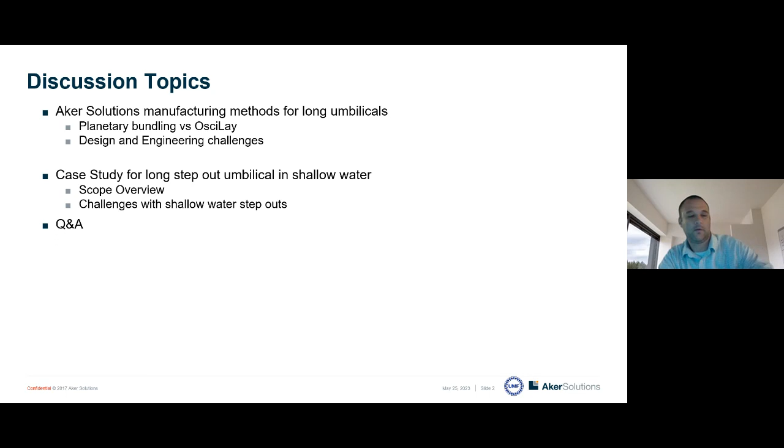Sorry about this, guys, I'm pretty early here today, 5 a.m. So there's only a few umbilical manufacturers in the world, and Aker Solutions is one of them. We have umbilical manufacturing sites in Mobile, Alabama, USA, and in Moss, Norway.

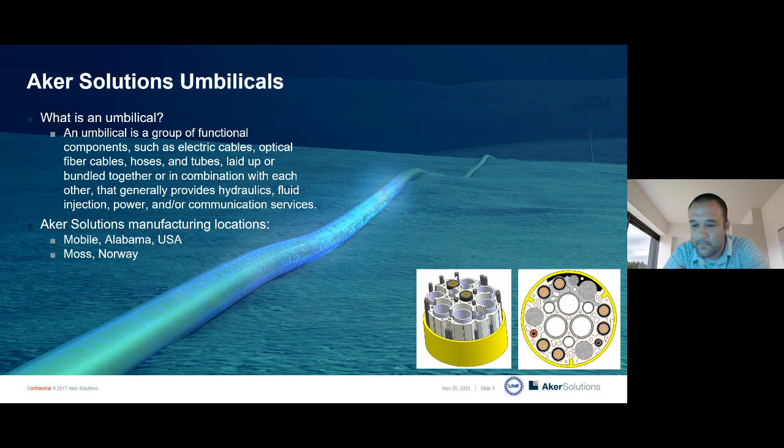So when you talk about manufacturing umbilical, there's two common ways to do this. The biggest difference is how you bundle the umbilical. On the slide now, basically we have your planetary method, which is the most common, and the OsciLay or alternating helix method. So we'll start with the image on the left, or the section on the left, which is planetary. This is the most common.

We basically get the functional elements on transportation reels. They're then loaded into what we call a planetary, which is the big disc that you see there in the bottom left picture. Those planetaries spin, and as they spin, you're paying off the functional elements into the umbilical, making the helix. I forgot to mention the key point with a planetary laid up umbilical is all elements are spinning in the same direction. So if you look at the individual elements, they look like a screw thread.

Planetaries have a limited number of positions for functional elements, with a particular weight limitation on each one. For small umbilicals, you can get it in one pass through the machine. For larger umbilicals that exceed the maximum quantity of positions in the planetary, you have to do multiple passes. We call this a double closing, or even a triple closing if it's large enough.

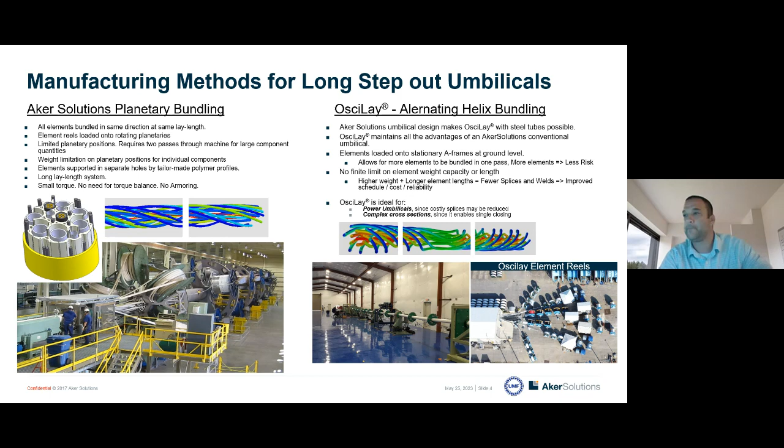There's an increased level of influence that wave action and current action puts on an umbilical when it's in shallow water, as opposed to deeper waters like in the Gulf of Mexico. In order to have a stable umbilical, it really needs to be heavy if you want it stable by itself, and sometimes it gets to a point where you can't get it heavy enough to be stable. So that's always a design challenge of how to stabilize it on the seafloor.

The next design challenge is if you're in shallow water, you likely have a shore approach, which means there's some distance that you are dragging the umbilical along the seabed to the hang-off point. There also may be a pull-in through a conduit with a number of bends. These are all things that increase the amount of load on your umbilical that may not be so apparent to you. You may not know the length, or how close the installation vessel can get to land.

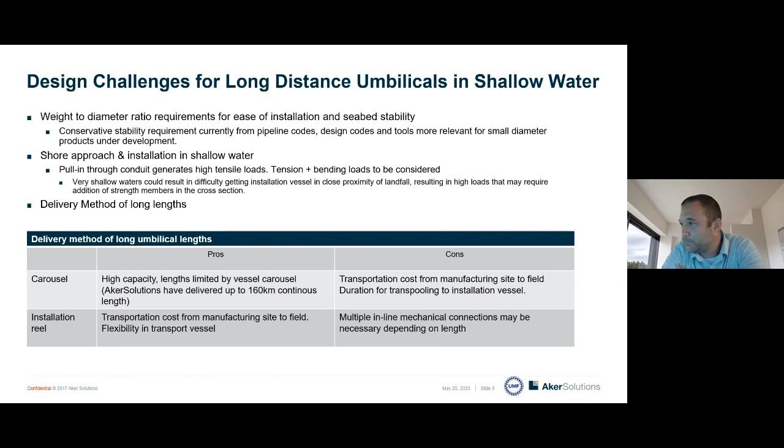So the cross-section design of this project: we chose to use the OsciLay manufacturing method due to various reasons, length being one of them. The primary design standards for the umbilical was API 17E, F101, and client specifications that we received. The total length for the whole field is a little over 100 kilometers, split between 4 different umbilicals. These are static umbilicals with topside to topside terminations, meaning both ends are terminated out of the water and not submerged during the design life. The function of the umbilicals is to supply power, communication, and injection fluids to the wellhead platforms.

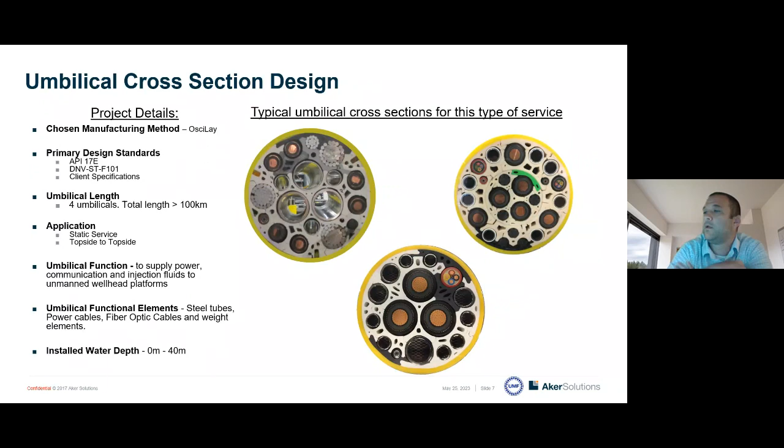At this region, there's a heavy influence of wave and current on the umbilical, and you risk overbending or overstressing the umbilical there. So it needs to be protected with steel bend restrictors. Integrated into that is a J-tube seal to plug up the bottom of the J-tube, so you can fill it up with corrosion inhibitors.

So there's some length that runs along the seabed. In this case, it was a very long length. Then to a conduit that the umbilical was installed through to be pulled into an onshore hang-off location, which may be seen in a vertical orientation, but in this case, it's horizontal.

We had a few engineering and design challenges on the project, most of which I've already explained in a previous slide. The biggest one we had was seabed stability. It's shallow water, with a lot of wave action. In order to get the umbilical stable in every scenario, it had to be extremely heavy. We did add some weight to the cross section to get it stable for some parts of the field, but in the shallower regions, it's not stable on its own, so it has to have some secondary stabilization. That may be trenching, rock dumping, mattresses, or what have you.

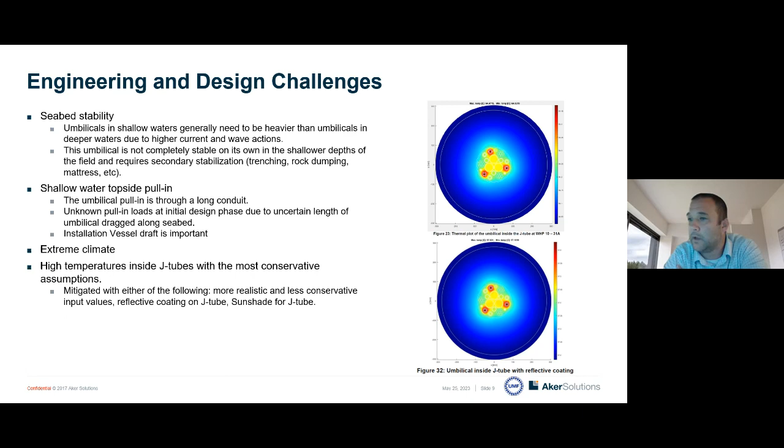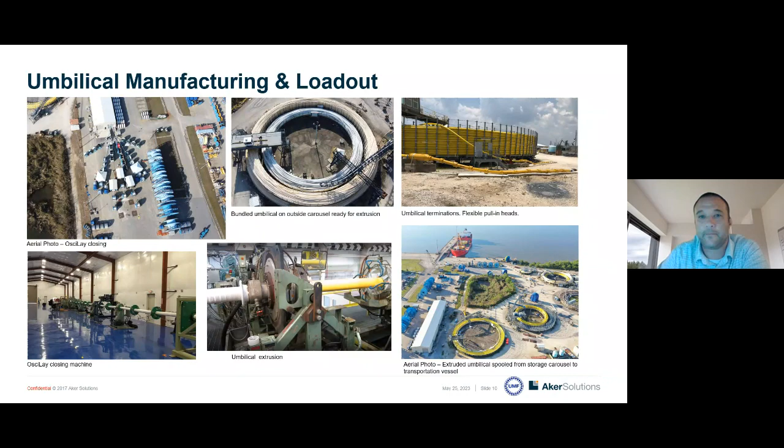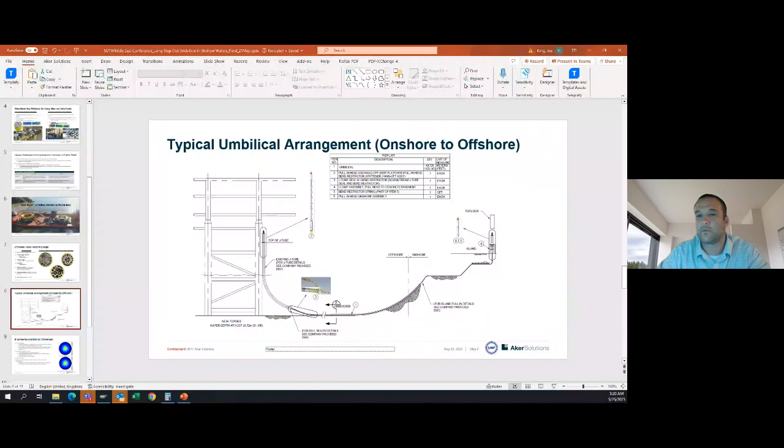Neil, you're on mute.

Okay, good afternoon, good morning, everyone, depending on which part of the world you're in. Today, on behalf of JDR, I'll be talking about SSIV umbilicals. Firstly, just to thank the SUT and the UMF for organising this event. It's really good to have a spotlight on umbilicals. In particular, I think it's a great time to do it. In the Middle East, we're especially seeing a huge increase in demand for umbilicals, so I think it's great to have a specific event focused on this product.

In terms of what I'll discuss today, we'll start off with a brief introduction. I will keep it short about JDR just to set some context about where we're coming from with these products. I'll then discuss what an SSIV umbilical is, and I'll of course explain the acronym for anyone who isn't aware. We'll look at a general SSIV umbilical design, and we'll look at the typical scope of supply for the hardware. Then, as the topic for this event is developments in umbilicals, the main development with SSIV umbilicals is the actual increase in the market rather than the technical scope itself. So what I'll touch on at the end is execution essentials in order to handle this latest development and the increase in the volume of these projects.

Okay, so firstly about JDR. We are a world-class provider of technologies and services connecting the global offshore oil and gas and renewable energy industries. This covers a broad range of products and markets, including subsea umbilicals, both steel tube or thermoplastic hose umbilicals, subsea medium and high voltage power cables, both for oil and gas power transmission or for renewable as well.

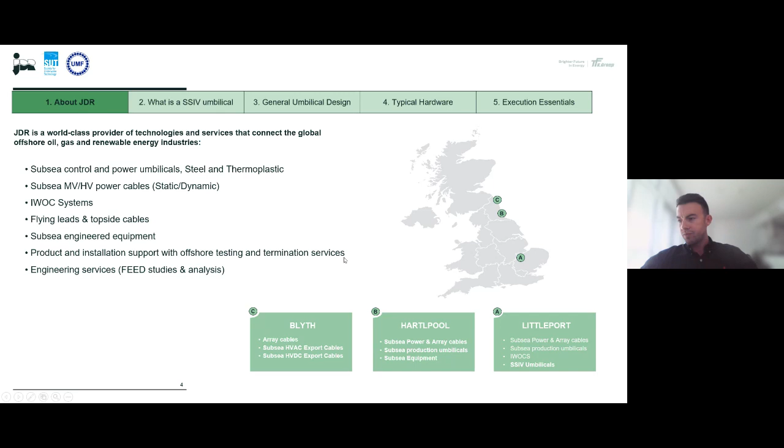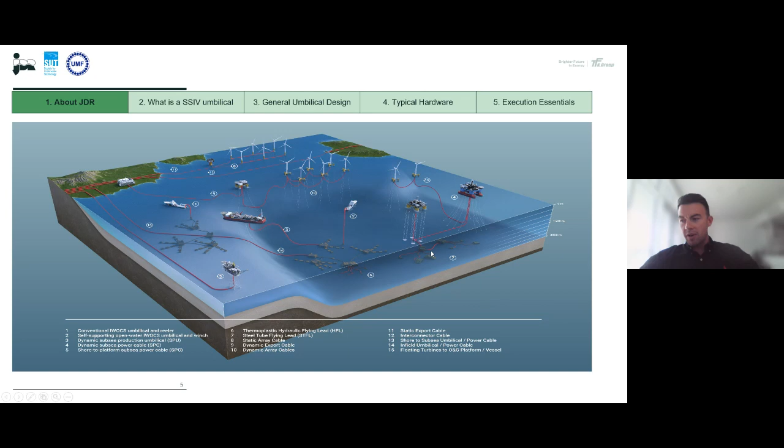Just a quick infographic here. This is the product portfolio and industries that we supply to. Whether it be wind farms, FPSOs, platforms, or even other renewable energy sources such as wind or tidal, connections to shore, subsea - everything to do with subsea umbilicals, cables, that JDR can support with.

Okay, so moving on to SSIV umbilicals. Firstly, SSIV stands for Subsea Safety Isolation Valve. This is a valve which, in an emergency scenario, isolates the platform from hydrocarbon flow. Clearly it's safety critical, both for the personnel and any equipment on the platform, and therefore the timely and correct operation of the valve is essential. What the SSIV umbilical does is it provides the hydraulic and electrical functionality in order to operate and control that valve and ensure that it's correctly closed.

Because the SSIV umbilical has a fairly limited operational requirement, it's a very important requirement - as I said, it's safety critical, but it's a specific purpose. So what that means is that there's less components than you may see for other umbilicals, where they'll be forming a range of other functionality.

So the components are quite simple, and on the right here you'll see a cross section of the umbilical, which is what you'd see if you cut through the umbilical. We have hydraulic lines and low voltage electrical lines. In terms of the hydraulic hoses, these are almost always hoses because they're only performing hydraulic function, so there's not really any necessity for them to be steel tube. In particular in the Middle East with the shallow water, it's unusual for us to have a requirement where tube is necessary. In terms of the power, these will be low voltage cables. There's usually a low number of these components, but it's worth noting that because of the safety critical nature, there's quite often spares or contingency included within the quantities in the umbilical.

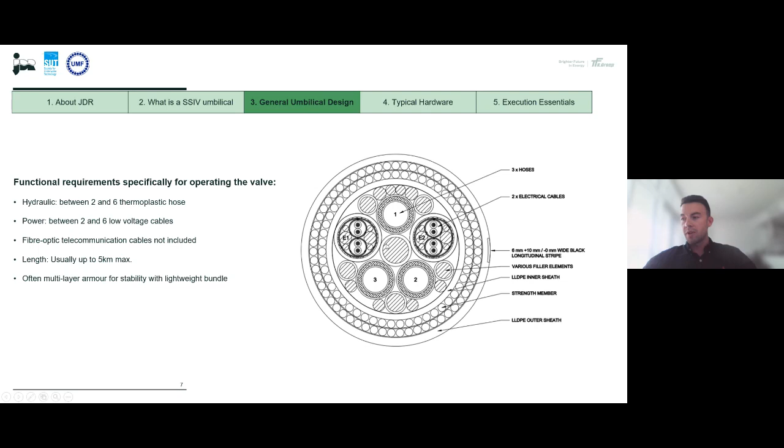So in terms of the typical hardware scope of supply, it's quite a straightforward and simple scope, something that's quite typical for most umbilical projects for platform connections. Starting from the top and working our way down briefly.

We have electrical and hydraulic junction boxes. They connect the umbilical tails to the topside platform connections.

We have the pulling heads. This is how the umbilical is handled and installed subsea, with the pulling head attached to a winch wire and pulled through the J-tube to the topside location. At that point, a hang-off is used, which is the mechanical termination on the umbilical that supports the load at the top of the J-tube for the design life.

Subsea, we have a J-tube seal or centralizer that positions the umbilical at the bottom of the J-tube. In the case of the seal, it prevents any exchange of fluid between the seawater and the J-tube inhibitor.

Going to the subsea end of the umbilical, we have the subsea umbilical termination unit, quite often called a SUTU, sometimes maybe called a SUTA depending on your acronym preference. This is what's used to install the umbilical to the valve location. Within this metallic structure, there'll be termination of the hoses and cables via subsea couplers and connectors onto a bulkhead plate, which is used to position the mechanical termination at the location of the valve.

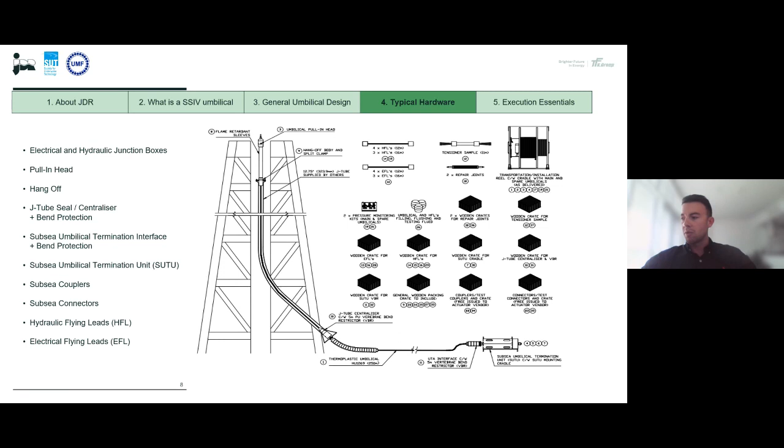So finally, I wanted to touch on some essentials for successful project execution. As I mentioned at the start, this is the real development we've seen in this product market, because the umbilical scope and hardware scope of supply are fairly straightforward. Really, the change we've seen is the much higher demand for these projects, potentially fivefold if not higher, in terms of the increase we've seen in the Middle East for SSIV umbilicals, largely driven by Aramco currently through their CRPO project release program.

There's a number of SSIV umbilicals as part of that. So with that in mind, the considerations in order to successfully deliver an SSIV project are quite different when the scales are increased massively. The points we'd highlight as key to handle this increased scale are the following three: supply chain control.

In-house manufacture of umbilical components is very beneficial, because we've seen lately through the pandemic how unforeseen supply issues can impact. Having the cables and hoses in-house gives massive control over that, and especially when the umbilical itself has a limited number of components, it means you essentially have full control over the umbilical supply.

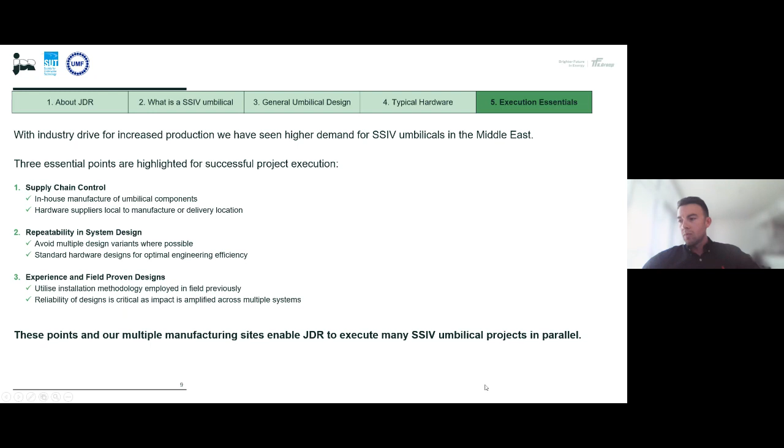So that concludes my part of the presentation. Thank you for listening, and I'll hand back to Neil.

Thank you, Angus, for your presentation on SSIV umbilicals and the associated hardware. It's important to note that, although they're short in length, due to the hardware needed, each umbilical is a fully fledged system in itself.

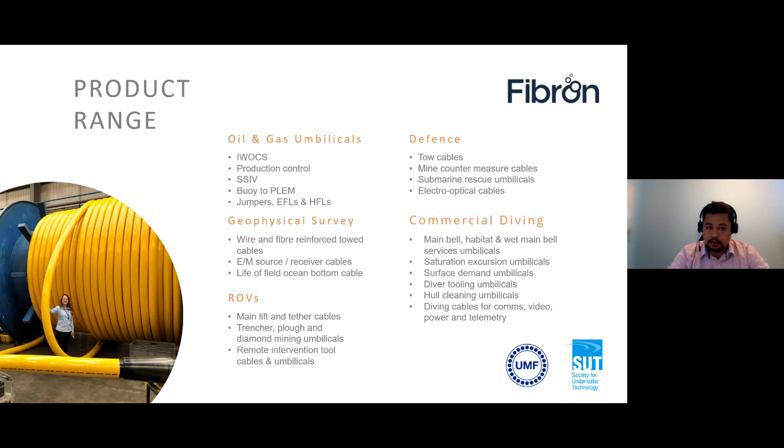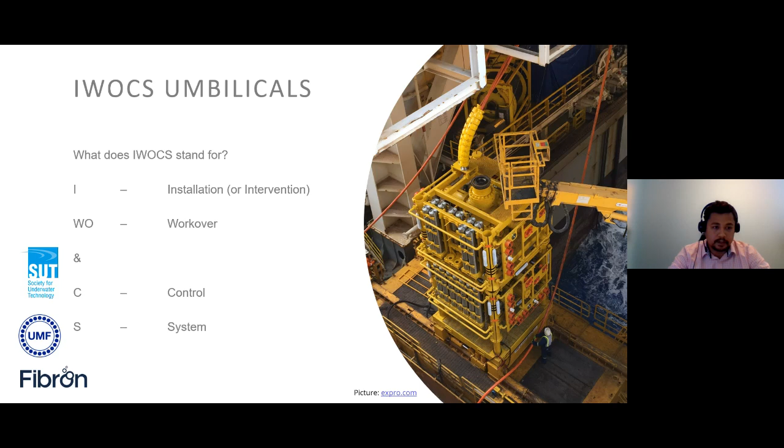For some context, and for those not familiar with the term IWOCS, what does IWOCS stand for? IWOCS stands for Installation, Workover and Control System. Sometimes the word installation is interchangeable with intervention, because it depends on the stage in the process of a subsea well completion or an intervention, but generally it's installation, workover, and control system.

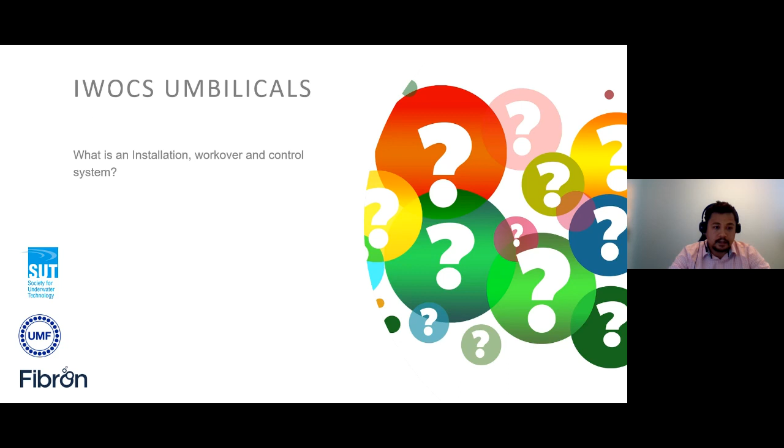So what is an IWOCS, an installation, workover, and control system? Essentially, an IWOCS is a package of equipment for use offshore and subsea. It allows the user to install or intervene, for example for maintenance or repair purposes, and to complete work on subsea wells and subsea hardware or infrastructure.

In the Middle East, where you're looking at very shallow waters, subsea completions aren't too common, but if you did step out from a platform and need a well 2 to 3 kilometers away, or even further, you would then use an IWOCS to install that well and Christmas tree and hardware.

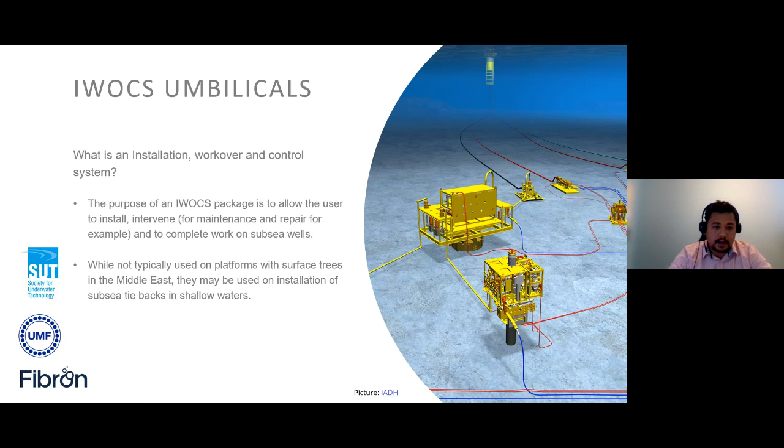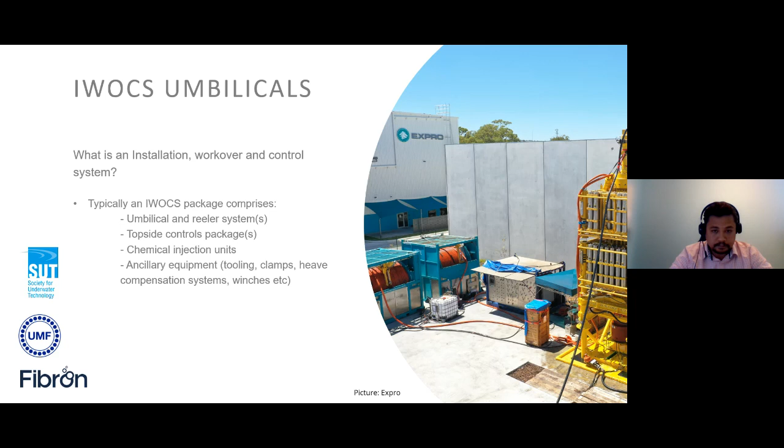These reels are either pneumatically driven, electrically driven, or hydraulically driven, again depending on the project requirement or what utilities are available on the vessel. All of the communication from the top to the bottom is performed through the umbilical.

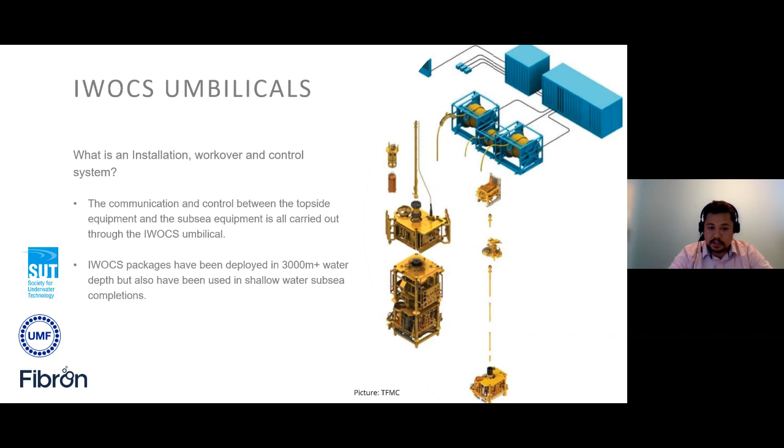So all the hydraulic control, chemical injection, the communications, and the monitoring is all done from topside through the umbilical when it's intervening or installing the subsea architecture. These packages are deployed in both shallow and deep water installations. In ultra deep water applications, the umbilical needs to be designed adequately to cope with the pressures seen at depth.

So looking more into the umbilical itself, what is an IWOCS umbilical? Joe represented this quite well on the production and control umbilical side of things, but essentially it's a number of components twisted together, electrical cables, fibre optics, and thermoplastic hoses into a flexible bundle.

The bundle is then extruded with an inner sheath of polyurethane, typically reinforced with Vectran braid, and then a final outer sheath of polyurethane is applied over the whole bundle to give it some further protection.

These are very, very flexible umbilicals, whereas the umbilicals that you've seen so far, because they're permanently installed, are reinforced with a contra-helical layer of armor. These IWOCS umbilicals are reinforced with a Vectran braid to give it the flexibility as well. These are typically used in operation for sort of two weeks or so as they complete a well, and again, they need to be very flexible.

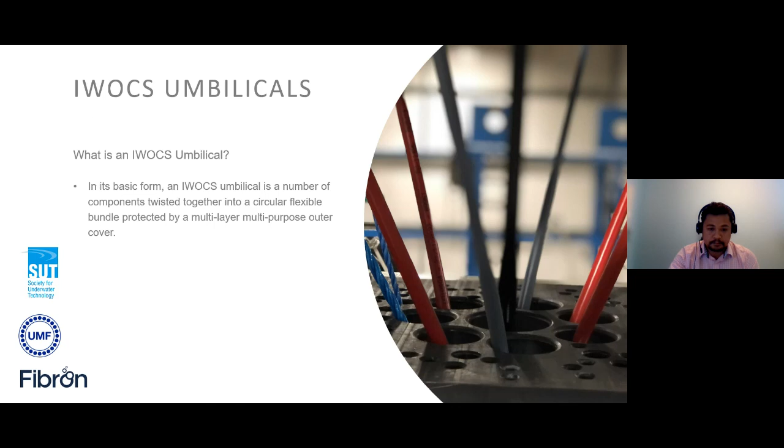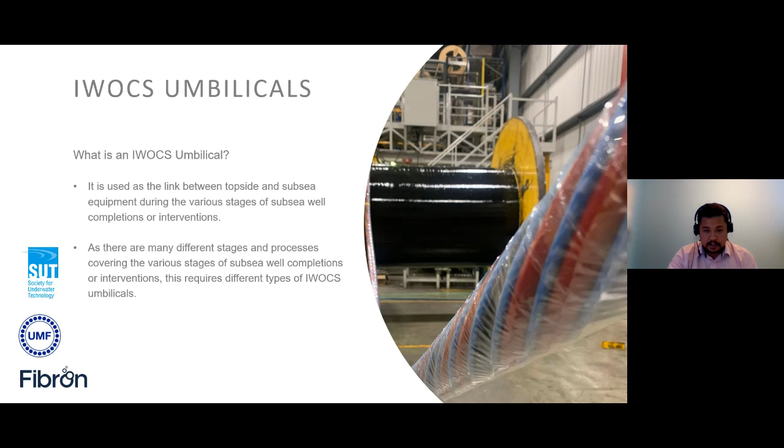So they're used as the link between the topside and the subsea equipment. And because of the various stages of installing a subsea well or a Christmas tree or just a subsea completion in general, there are many different IWOCS umbilicals that are supplied. Generally, they have similar functionality, but some specific umbilicals perform specific tasks.

An XT umbilical generally is the largest of the whole lot, and it contains a lot of the functionality to complete and finish off Christmas tree installations. LS umbilicals are for landing string installations, tubing hanger umbilicals, lubricator valve umbilicals, annulus, and BOP umbilicals.

So again, depending on the stage of installation of the subsea well or an intervention, different functionality is required for the umbilical to allow the user to intervene or install.

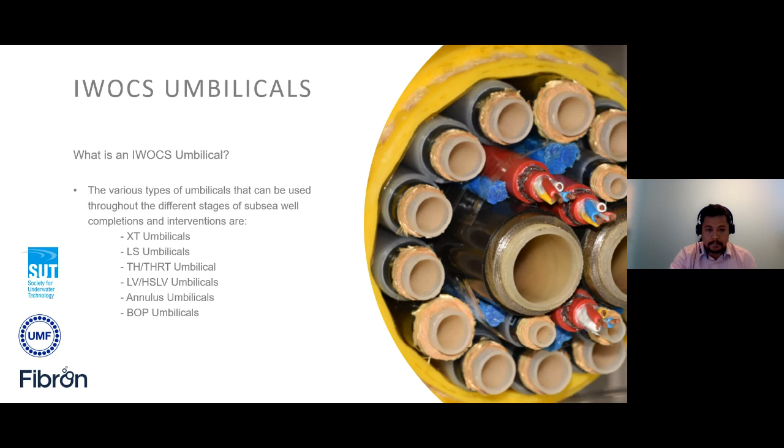So the umbilicals comprise of thermoplastic hoses. There aren't steel tubes in these - it would be too stiff, and the MBR would be very, very high. So typically the hydraulic control is done through thermoplastic hoses along with chemical injection. Power and comms are done through low voltage cables, and you can have fibre optics within the umbilical for communication purposes as well.

So the inner sheath and the outer sheath are typically polyurethane material to provide flexibility, but there are alternative materials depending on where the umbilical reeler system is located, depending on the project requirements. You could sheathe the umbilical in PE or thermoplastic rubber, for example, but generally it's polyurethane, and the strength is provided by the Vectran braid.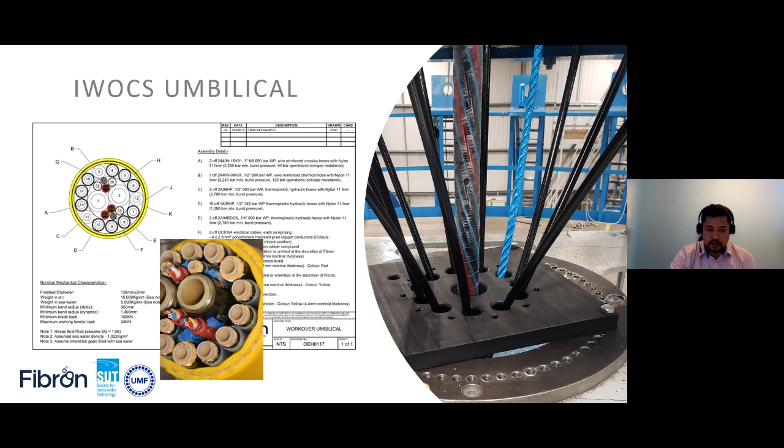So these are very different to the permanently installed umbilicals that you've just seen presentations on, purely because of the application these are used in. So looking at the hoses...

Thermoplastic hoses with either collapse resistant requirements or non-collapse resistant requirements, again depending on the depth required for the installation or intervention. Various liner materials are used, so you've got nylon, typically nylon 11, but then you've got access to polyethylene lined hoses, as well as some other hose manufacturers that include their own proprietary high temperature and more chemically resistant liner materials.

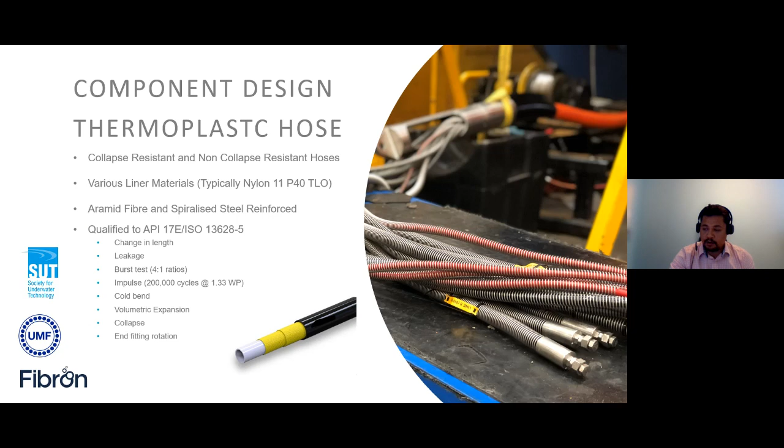Hoses are typically reinforced with aramid fibre to give the burst reinforcement, and there are specialist hoses out there which utilize a spiralized steel reinforcement. These are typically for low volumetric expansion requirements. But any umbilical using these hoses will have them all qualified to API and ISO, which are the requisite standards.

Low voltage cables then - so typically in an IWOCS umbilical, you'll have a pair or a quad, 2.5 square mil pair or quad.

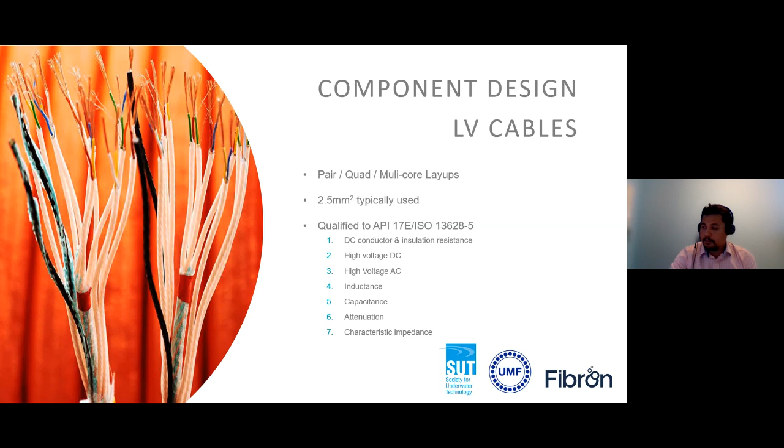There are other multi-core layups that are used as well, again designed to the requisite standards, API and ISO. Likewise with fibre optics, these can be included in the umbilical if required for communication purposes.

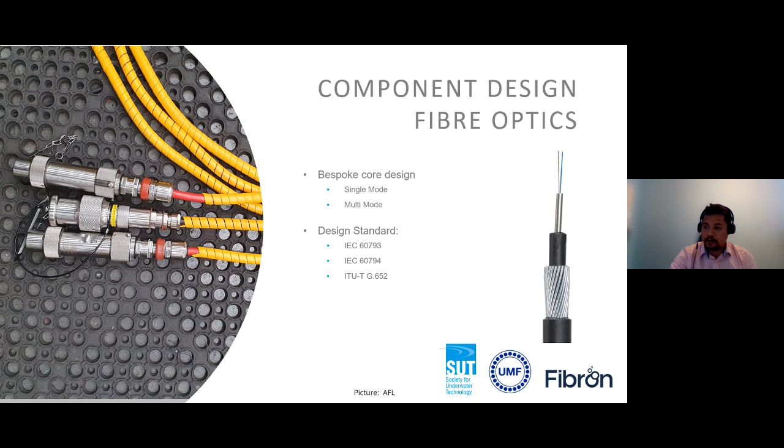So how is an IWOCS umbilical deployed? These umbilicals are stored on reeler systems sized to suit the MBR of the umbilical, as well as the length required. They're electrically, hydraulically or pneumatically driven, depending on the loading requirements for the project. Sometimes customers have an overlength to allow them to be used in multiple locations, not just in the field they'll first be installing, since they may want to use this in different locations or fields with different depths.

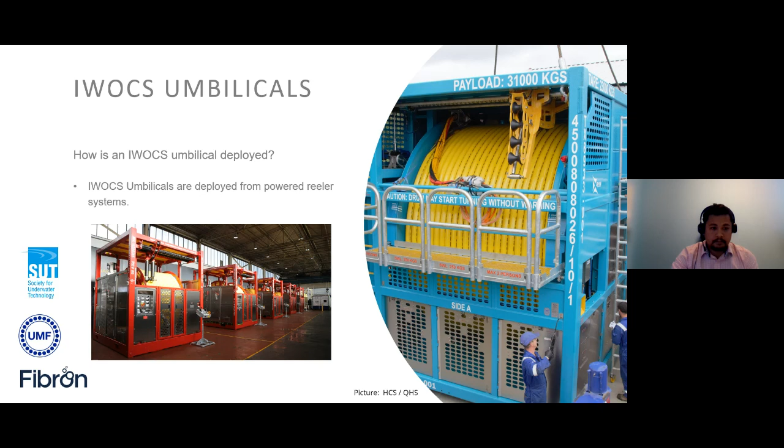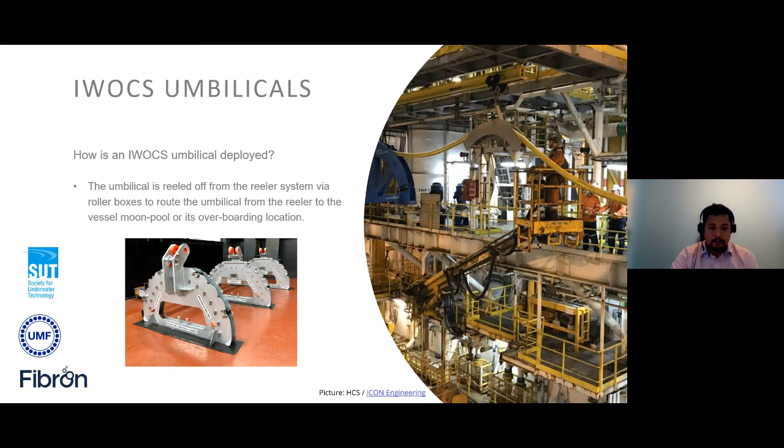These IWOCS are routed from where the reeler system is located on the back of the vessel, over roller box sheaves to either the moon pool or the overboarding location, essentially where the subsea package is going to be lowered from.

At the subsea end of the umbilical, as it's routed from the reeler system over the roller box sheaves to the overboarding location, there will be a subsea termination unit. There are many different types depending on where the umbilical is going, in riser or out riser, whatever function it's performing, and how much space constraint there is around the termination. Generally, the end of the umbilical gets terminated to the subsea package before the whole thing is lowered down.

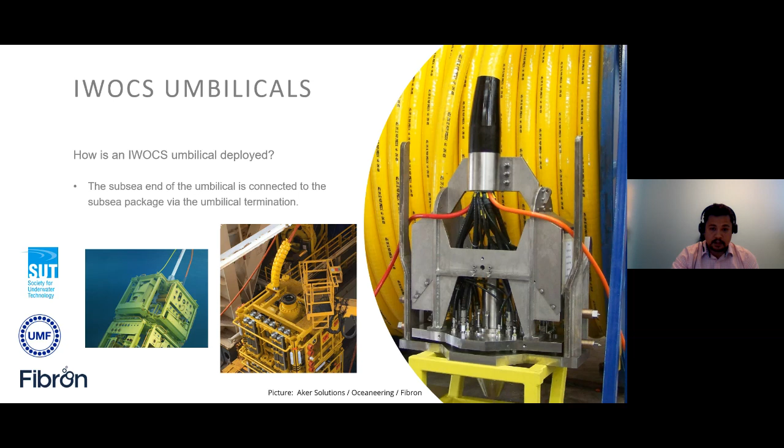As the subsea package is lowered through the moon pool or over the side of the vessel, the umbilical is clamped to the marine riser, drill pipe or wireline at regular intervals to reduce any loading on the umbilical. There are many different stages to the installation and the well completion, so there's a lot of literature out there if you're interested in that sort of thing.

Once the subsea package is lowered, connected in or installed, and they're ready to complete and move to the next location, they take the whole marine riser back up along with the umbilical, where it gets reeled back onto the reeler system, and they move on to the next location.

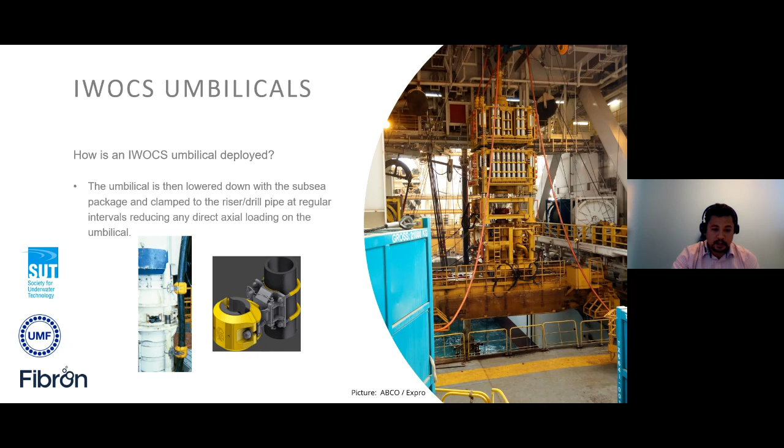In terms of IWOCS developments, projects are getting deeper, and temperature and pressure requirements are getting higher too. There have been a couple of developments in IWOCS umbilicals over the last couple of years.

Fibron has supplied its first 20K system, which went to Schlumberger back in 2021 for a landing string system. We worked with our hose manufacturers to get a fully qualified 20K hose, working with Spirstar and Parker, who supply the spiralized steel reinforced hoses.

We're also working with other technology suppliers to develop the IWOCS umbilicals further. Recently we supplied a long-term intervention umbilical where the customer needed a very flexible but potentially temporary solution for their development. The IWOCS umbilical was reeled down, connected into the subsea equipment, and operated for potentially up to a year or two, but possibly as quickly as a couple of months.

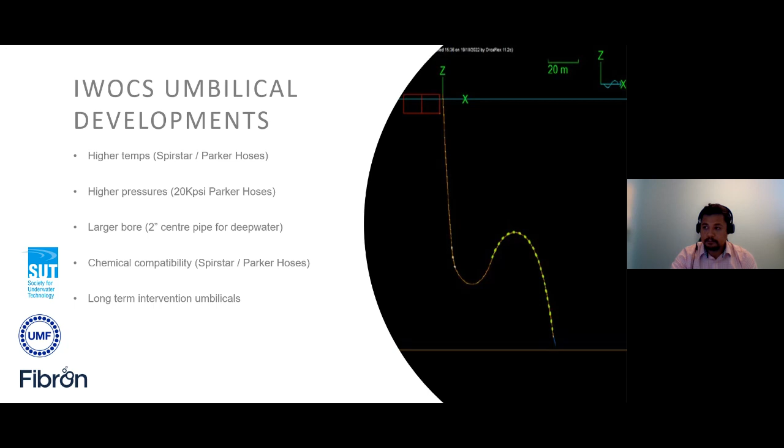There's a lot around IWOCS systems, not generally used a lot of the time in the Middle East, but you will need to use an IWOCS system if you do have a subsea intervention or installation. Thanks, and back to you, Neil.

Okay, thank you, Richard. Picking up on that last point, it's important to note that as much as the different umbilical types, whether production control umbilicals, SSIVs or IWOCS, can differ, there are similarities in terms of design considerations and manufacturing techniques between them.

Thank you, let me move on. So let me tell you a little bit about the UMF. Neil talked about that earlier on. UMF represents a large section of the global umbilical manufacturers. You can see at the bottom there, we've got Aker, Fibron, JDR, Nexans and Oceaneering - that's a large percentage of the global umbilical supply market.

We meet regularly every quarter or so, every year, to ensure we're supporting the industry and that our product reputation is maintained mainly in terms of safety and reliability. Neil shared a little bit about the goals of the UMF, but they're really to ensure that the umbilical manufacturers supply our products safely and suitable for successful installation and reliable operation. And we have to do that in a non-competitive way.

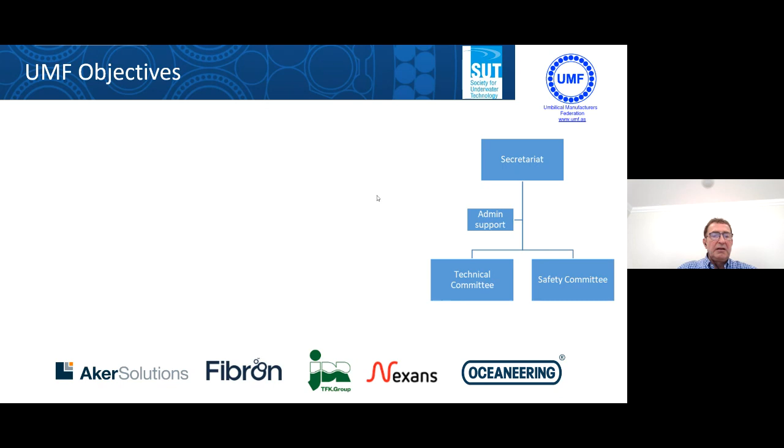The first thing is, of course, as always, number one, safety is our number one goal. We share safety aspects - it's a non-competitive thing, which is good. And since most of our processes and plants are similar, we can share desensitized lessons learned, trying to keep all our personnel safe and possible, and certainly not to repeat any incidents that others have had, others in our own plants and others in our other umbilical plants. It doesn't do the industry any good.

Our latest work focuses on steel tube umbilical processing because of the stored energy that's involved there, to prevent injuries from that significant energy level that we do when trying producing steel tubes of the lengths we do today.

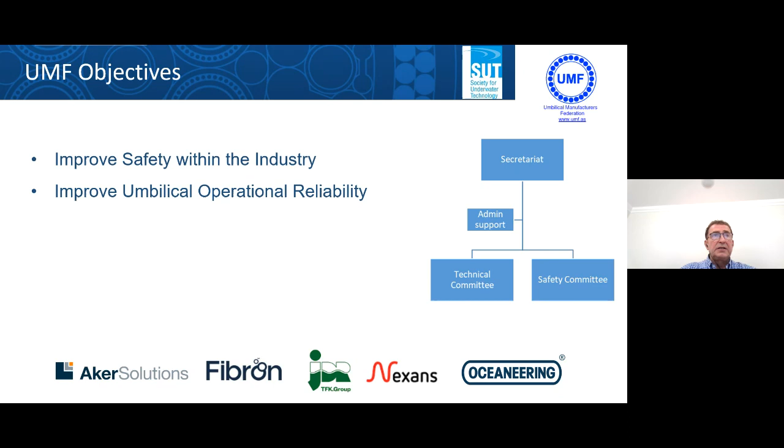Improve umbilical operational reliability - we want to make sure the products that leave our plants are installed correctly and don't compromise the operational reliability performance. These products are designed and manufactured to last in excess of 25 years, and that's a challenge in itself. So these products have got to be high quality and they have to have good designs, and they cannot be abused at all because of their sensitivity and their value.

This comes on to, yeah, we want to reduce umbilical installation failures. We want to make sure that we spend all this time and effort building these umbilicals, and we want to make sure that they're installed problem-free.

We also support the international standards for our products, the API 17E, ISO 13628-5, trying to ensure they reflect the needs of the market. So they're good there - they have some lessons learned, and they're a good guide to the industry how to try and make an umbilical purchase as good as it can be. So we want to make that standard as good as it can be.

The API standard guides those less experienced in these practices, but the bottom line is it doesn't protect you. It doesn't cover everything, and it doesn't guarantee complete project success. So the UMF tried to address some of the gaps in the standard to enhance guidance and understanding.

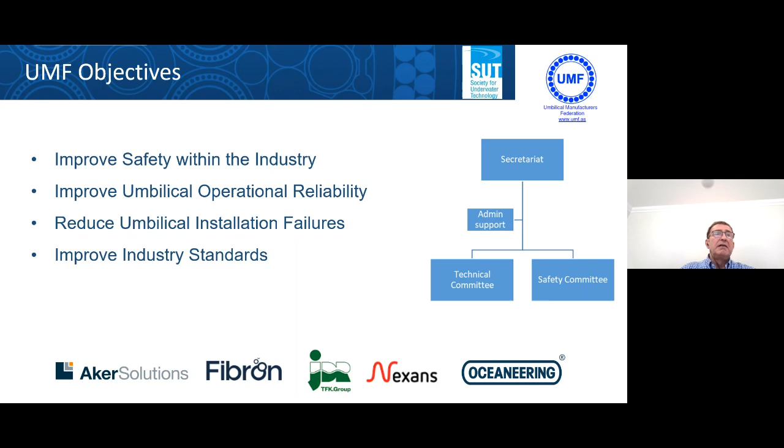So we've done that on a few things. Neil talked about earlier on - we've got our own website, we've generated some guidance notes. These guidance notes typically cover things that are not well covered in the standard. Hopefully they'll then move into the standard as we improve them from revision to revision.

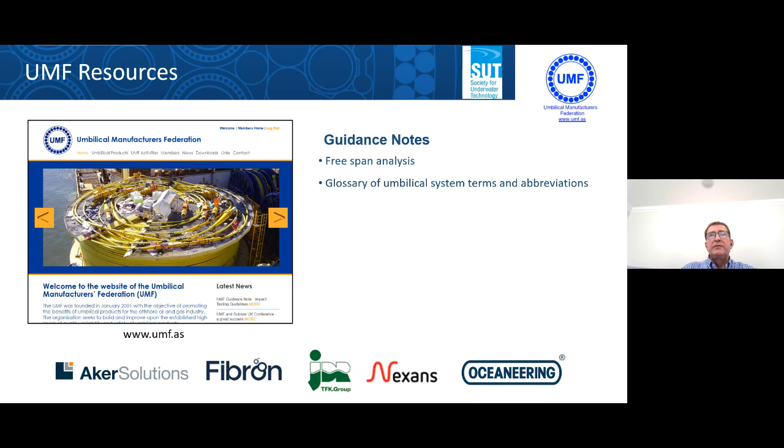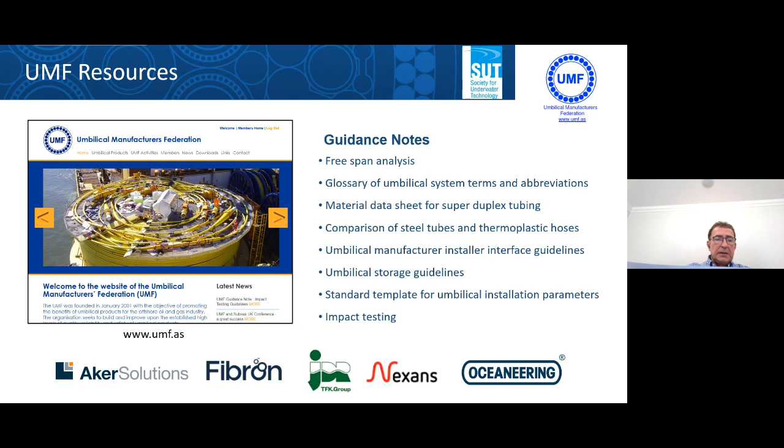So we've got data sheets, free span analysis. We've got information documents on steel tube versus thermoplastic, manufacturer installer interface guidelines, storage guidelines, standard template for umbilical installation parameters, and the most recent one, impact testing. So there's a lot of information there that's not covered in the standard, that's not necessarily in the public domain, that can help you.

So we share the desensitized information to make sure that we don't repeat some of the mistakes, because these umbilicals are very specialized, very custom, high quality, high value products, and we produce them in low volume. Some of these mistakes in the manufacturing plant, of course, happen, and our plants are not perfect, but normally on a project basis, issues that arise during design, manufacture and test can often be overcome with little or no impact to the purchaser's overall project schedule and cost. I know it's a pain and burden for the plants, but schedule and added cost are aspects that are typically overcome, and that's not where all our problems lie.

As I say, the problems in the plant are not historically where our major problems lie. In terms of helping project managers, engineers and schedulers plan for project success, we've got to do everything possible to try and reduce these risks.

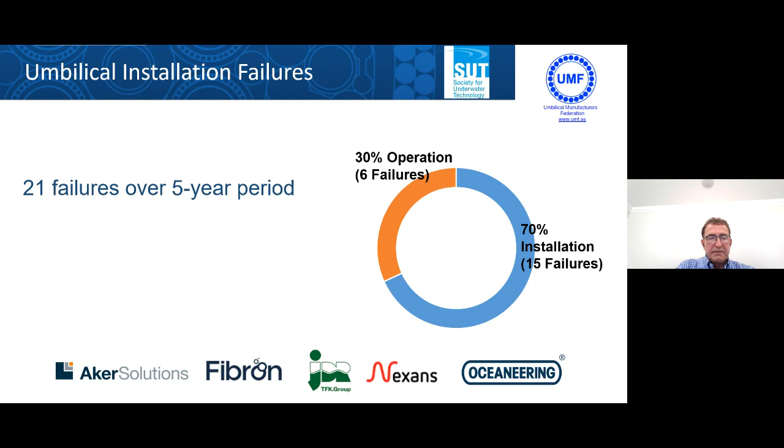Issues and concerns in manufacturing rarely manifest themselves during operation and installation. If you compare the quality aspects between manufacture and installation and operation, the manufacturer's got all these steps and many controls there - starting of the processes, inspections, and various stages where we can investigate and even correct if needed, compared to the higher singular risk during the continuous process of installation.

It's done once, it has to go perfect from start to finish without compromise. So the installation process is a really nervous time, and it's rare where the product that you buy takes more to install than the product itself. So maybe that's where we should focus.

As I say, we've taken some information - there's not a lot of detail here, just take this as some level of guidance. There's a lot of umbilicals supplied over the world, so this is a low percentage. Don't get me wrong.

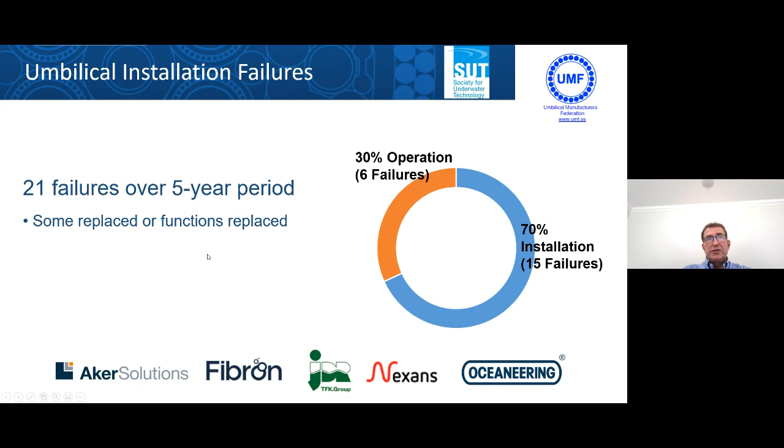We've had some problems during operation, which you would expect, but the majority of the problems in terms of the overall life cycle that are serious occur during the installation process. This is where some of the umbilicals have even had to be replaced, or some of the functions independently replaced - like a smaller umbilical with smaller functions piggybacked onto the existing system. And also some of the redundancy with the designs being consumed.

So the installation went okay, but we've had to use some of the other functions to supplement - no longer the redundancies within the product that a lot of customers include in the designs, knowing that if they do have some reliability concerns or issues, they can change to other products, other functional components within the design. But the bottom line is they can all be avoided.

The other part is historically, unfortunately, a lot of our installation vessels and experience is all related to pipelines and flow lines. But the umbilicals have far more sensitivity to failure than any of the other products, and they've all got to be installed at the same time.

So we've got to accept the umbilicals as part of the offshore install scope and accept that associated high risk. The failures during that installation process tend to be from unexpected and unplanned risks, and the fact that the umbilicals are less robust makes it quite sensitive, for the following reasons.

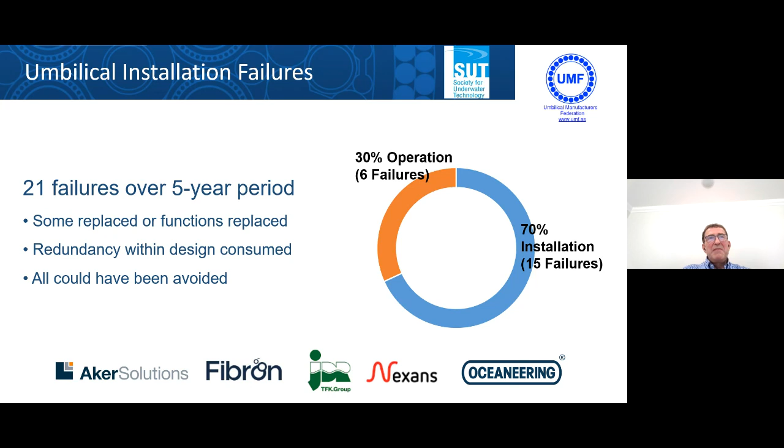An umbilical's got low stiffness to protect itself from overbend and load control. So if it just hangs down, being connected at tight corners, it's going to overbend itself. Whereas a pipeline is far more stiff and can protect itself, and like the flexible flow line, has far lower minimum bend radii.

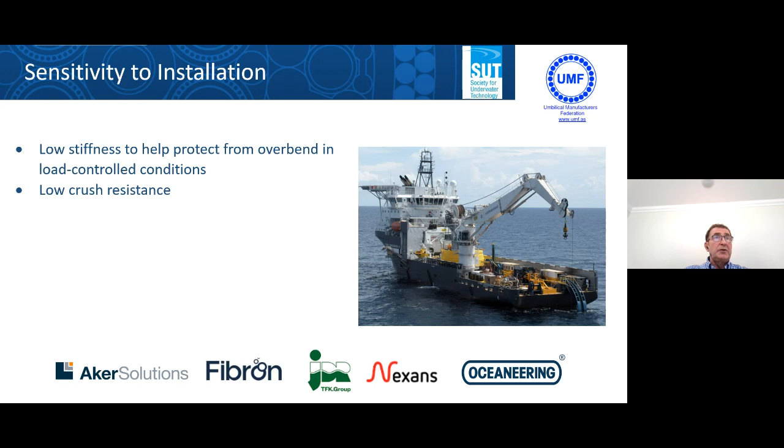It's got low crush resistance, so if we inadvertently crush it because we catch it between items of hardware, or don't have a caterpillar set correctly or designed correctly, we could exceed the crush resistance. Our products are low in crush resistance and very sensitive compared to the other products that are typically installed.

And if we're doing large bore steel tube umbilicals, they've got a really high bend radius that's got to be respected. Its diameter to bend radii ratio is relatively small and quite sensitive to handle.

Also, it's got low compressive buckling resistance, so when you compress this umbilical axially, there's a good chance it can buckle if you lose control of the process. And low torsional buckling resistance due to the high torsional stiffness and low bend stiffness - the combination of these two aspects.

So yeah, if you take the umbilical and put twist into it, because it's not that stiff, it can buckle on itself quite easily, like throw a loop or so.

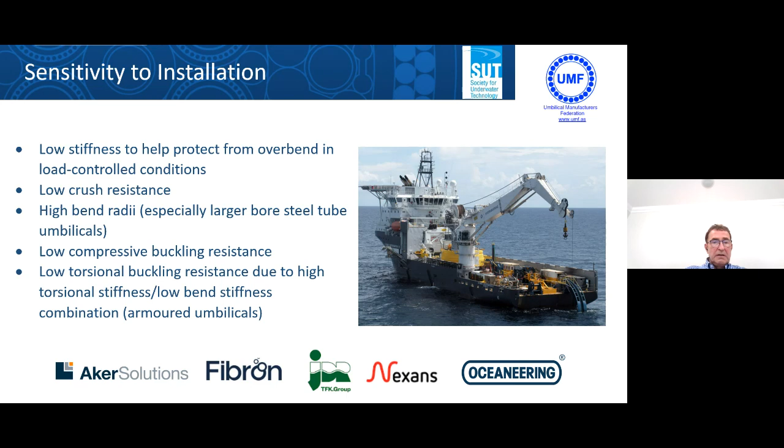Just move on to the next slide. So I wanted to talk a little bit about umbilical performance there in terms of the suitability of the equipment. We talked about the vessels typically designed not for umbilicals but for other products, pipelines and flexible flow lines.

And on top of that, a lot of the things that handle the umbilical, for instance the caterpillars - in our plant we've got multiple long length caterpillars that are soft and compliant, with multiple tracks. Each track is individually controlled with pressure, so basically, independent of what shape is going through the caterpillar, the same contact pressure is applied by all the pads across the umbilical system.

And some of the vessels have been upgraded to do this, but some have just got single short length caterpillars designed for pipelines with maybe only 2 tracks, but massive compression loads on them. So it's important to assess the sensitivity of the product for the installation.

Now, talking about just some of these handling failures, we can only go over a few of them, of course. So as you'd imagine, because of the product having that inability to protect itself from overbending, this can happen.

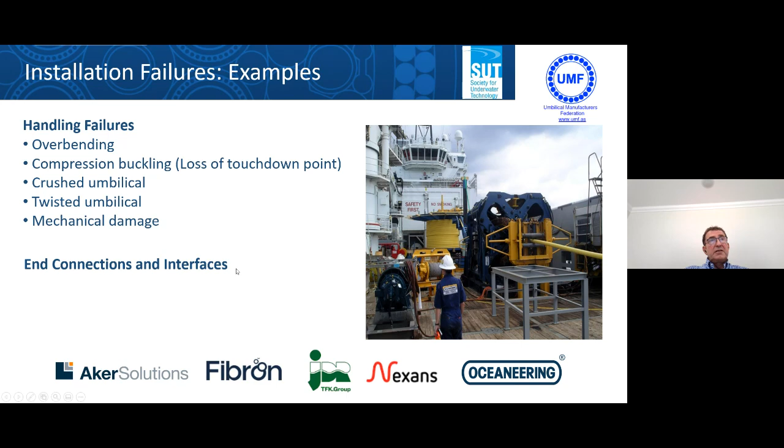We also have certain issues with end connections at the interfaces, and this is an area the industry needs to work on and improve.

So we've had interfaces and connections break, so uncontrolled drop end of an umbilical. How bizarre is that? Mechanical failure of end connections, so just physically breaking or not rotating or not performing their function. Interface errors, as you can imagine, these 2 things have to come together.

And then, of course, hydraulic leaks. So yeah, they're quite varied.

The other part we've got often is we don't often understand the umbilical itself. Often the umbilicals are purchased with a timeline where the umbilical's actual performance is unknown, or it's known too late, or the headroom that's not been tested, which is really important for robustness for when we have abnormal and unplanned events.

These products are sensitive, and we've got to handle them carefully. Unplanned events, abnormal events, can be damaging depending on what they are, depending on the overcapacity that happens to be in that particular umbilical design.

So the installation is unique. Remember, it's not rehearsed. We do this all the time in our manufacturing processes, and it's a one-off operation. So the installation is a very difficult, sensitive thing to do. I know it's difficult being an umbilical manufacturer, but please understand it's very difficult to be an installer, particularly an installer of umbilicals and the associated risk that comes with them.

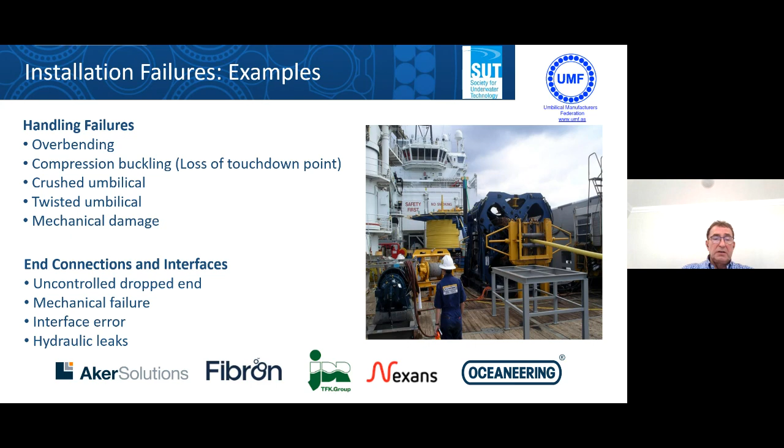So we've got some recommendations for project success we'll quickly go over. The whole basis of this slide is balance of resources and quality across manufacture and installation. So make sure it is balanced.

What the UMF's experience is, it's not balanced, and we need to spend more time and effort particularly on the installation phase. The plants are more focused on making the product, but they're actually the best group to assist the installers in reducing risk.

So more emphasis on the installation analysis, the preparation for this, the procedures, and any qualification that's needed for that process. This needs to be considered differently by the project managers, particularly the purchasing project managers, and even on the scheduling side.

On top of that, in this region we're talking about today, there's quite a few things that are novel and new in terms of installing - the shallow water, seabed stability, meeting land, etc. So focus on these things because they are high risk.

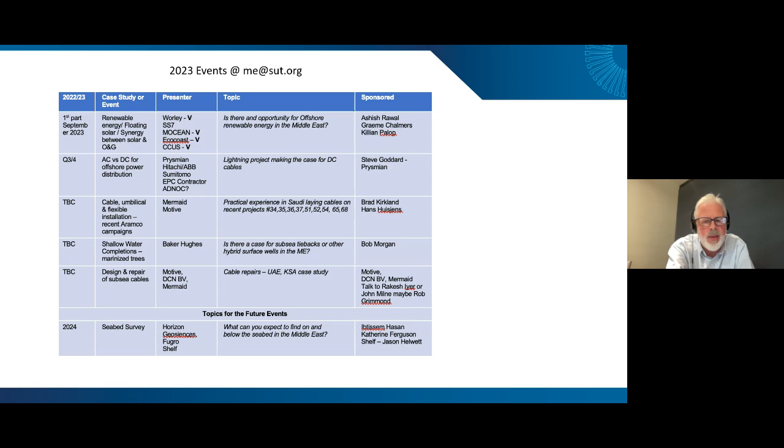There's lots of interesting topics to debate around cable umbilical lay, given what's been going into the water in the last couple of months and years. We want to talk about shallow water completions at some point - that's the stuff that Richard was talking about with IWOCS completions. At some point I think we'll see shallow water subsea completions in the Middle East, and who knows, we'll see some IWOCS being deployed. We certainly see them in the Egyptian market. Then there's design and repair, and then at some point we're going to talk about seabed survey.